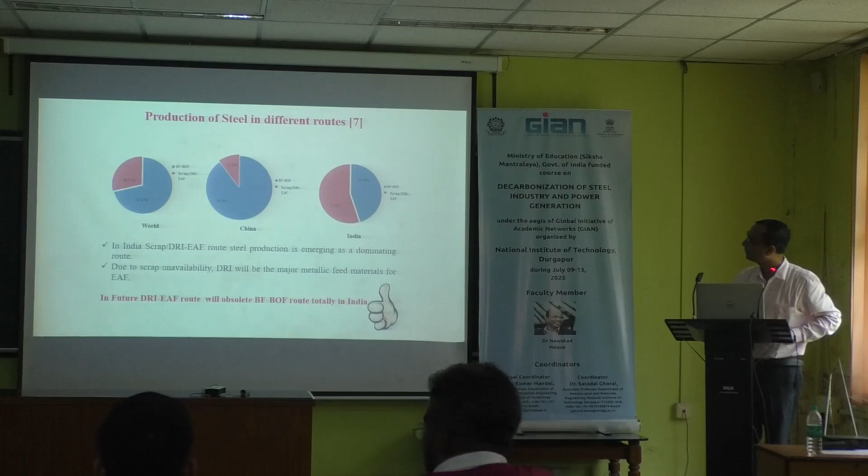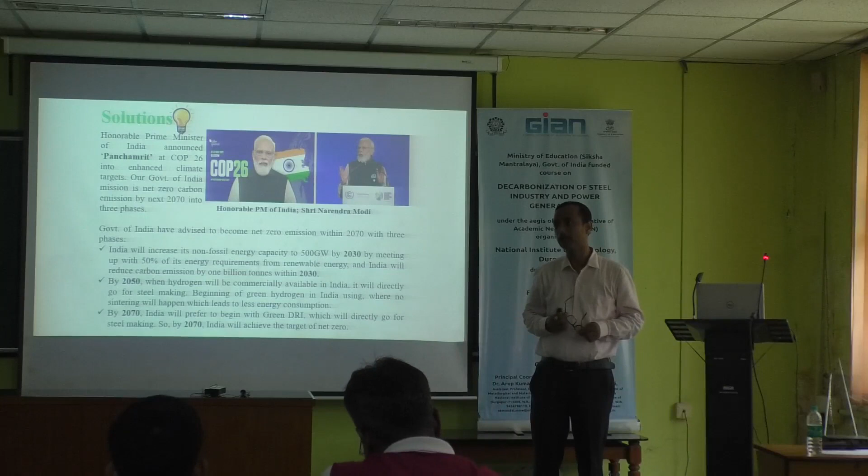We have already discussed a lot regarding alternate energy sources, biomass and hydrogen - these two are proven technologies. Biomass we discussed in the last PPT. Some participants asked for data regarding India - what are the initiatives of the Government of India. TERI will discuss this in detail because they are preparing the roadmap for decarbonization in India. By 2070, the Indian government has targeted net zero.

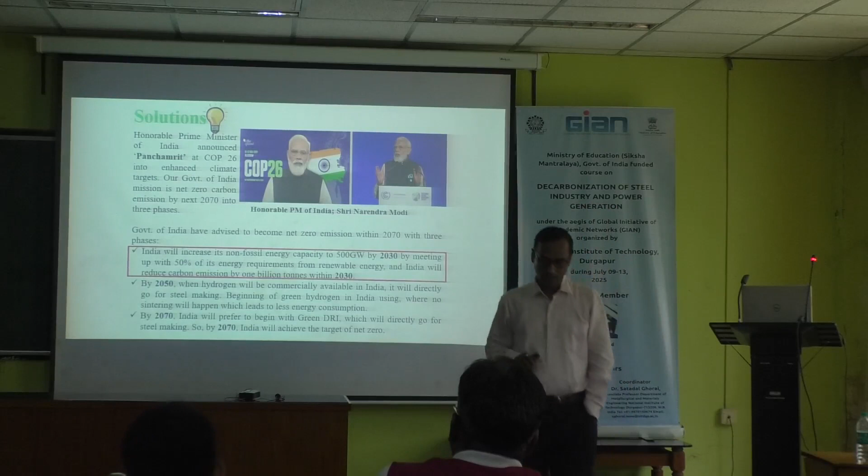We have decided how, in a stepwise manner, we will go for net zero by 2070. First, up to 2030, India will increase its non-fossil fuel energy capacity. This is as per the COP26 commitment. The Prime Minister of India announced the Panchamrit. By 2030, India will increase non-fossil energy capacity to 500 gigawatts, meeting up to 50% of its energy requirement from renewable sources, and India will reduce carbon emissions by 1 billion tons. I don't know how much will be achieved, but that was the target set at the COP26 summit.

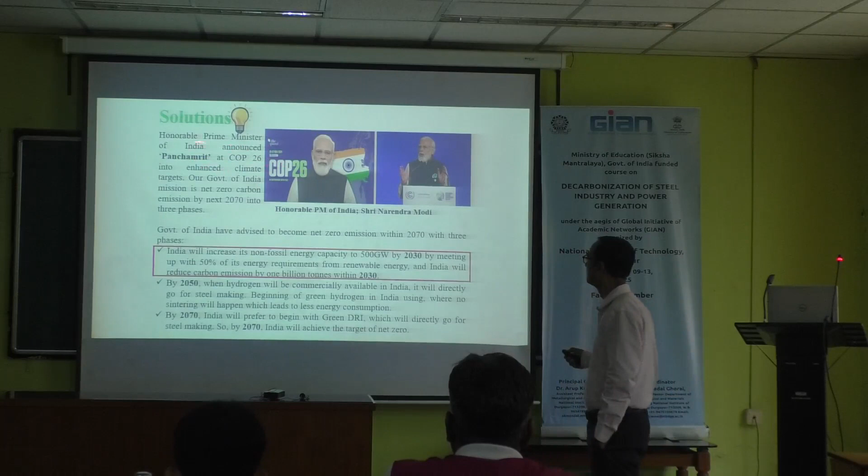By 2030, it means gradually we are going to invest and take initiatives for renewable energy. I will show you India's initiatives - not only the final projects but the projected investment, the total projected investment towards renewable energy sources, towards decarbonization. And by 2050...

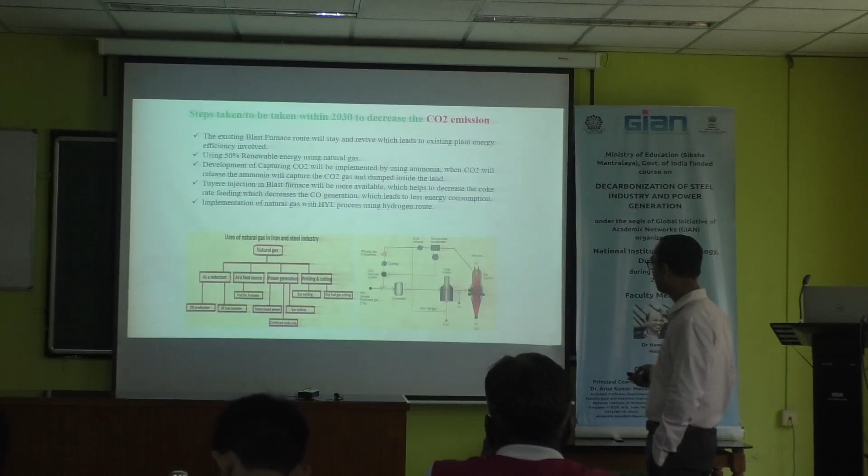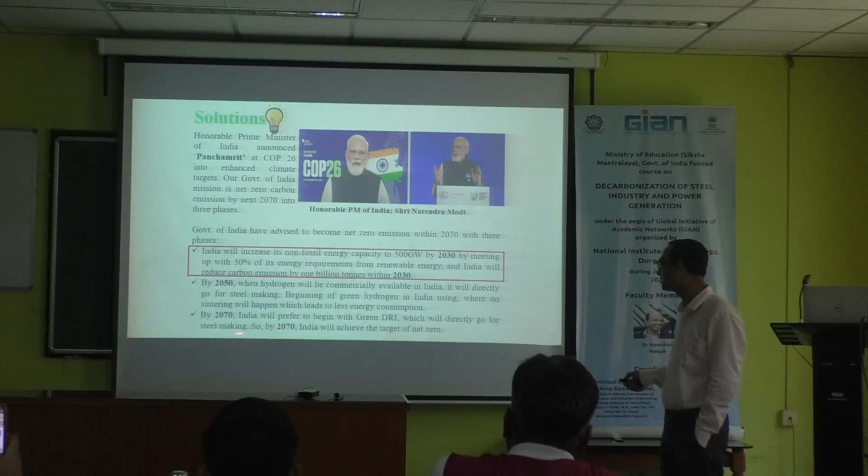When hydrogen becomes commercially available in India, it will go directly to steel making. The beginning of green hydrogen in India is where no sintering will happen. It means after 2050 the target is that sintering has to become obsolete. So we are not talking about scrapping the blast furnace, but scrapping the sinter plant. This means we have to focus more on DRI and pellets. By 2070, India will prefer to begin with green DRI and go directly for steel making. But by 2070 we won't be around to see what happens - therefore we can propose it for 2070.

So what should be the steps? First, the existing blast furnaces will stay because our main strength is blast furnace technology. Although we are the largest producer of DRI, we cannot obsolete the blast furnace route, but we can use 50% renewable energy. The second thing we have to take up in our presentation is development of CO2 capture, which will be the major focus, because we want to reduce CO2 emissions while keeping the blast furnace. So we have to manage CCU or CCUS.

I will show you the agreement and collaboration with the UK - we are investing in blast furnace technology. Although the replacement potential is only 10%, we have to increase it, through blast furnace fuel injection and implementation of natural gas in place of oil, which JSW is doing.

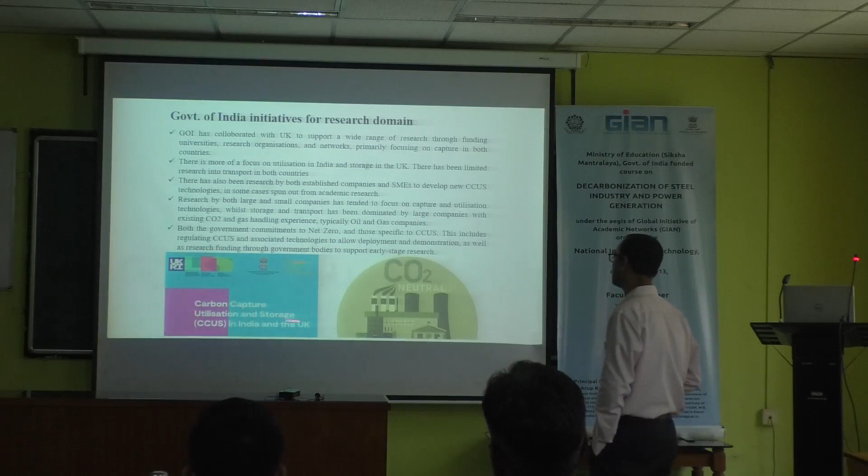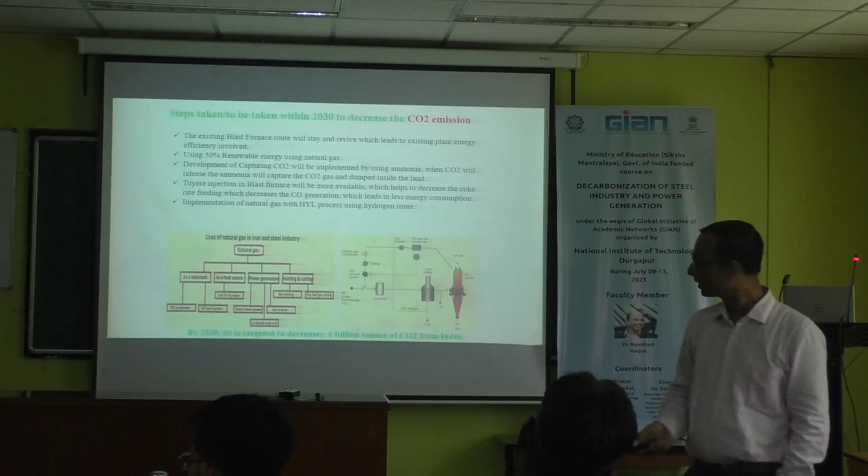In the previous slide, point number 3 discusses how ammonia captures CO2 gas, forming ammonium carbonate. Development of CO2 capture will be implemented using ammonia - when CO2 is released, the ammonia will capture the CO2 gas and dump it inside the land. A lot of technologies are developing, such as storage and utilization. Utilization is one aspect, but in case of storage, you have to stabilize the CO2, possibly using alkaline media or ammonia, to fix the CO2 so it forms a stable compound like ammonium carbonate that can be dumped. A lot of research is going on, not only for ammonium carbonate, but the problem is with the geologists...

The problem is the stability or life of this compound. How long will it stay as a compound? Is there any long-term effect or dissociation of that compound so that in future CO2 will again revert back? These are the issues.

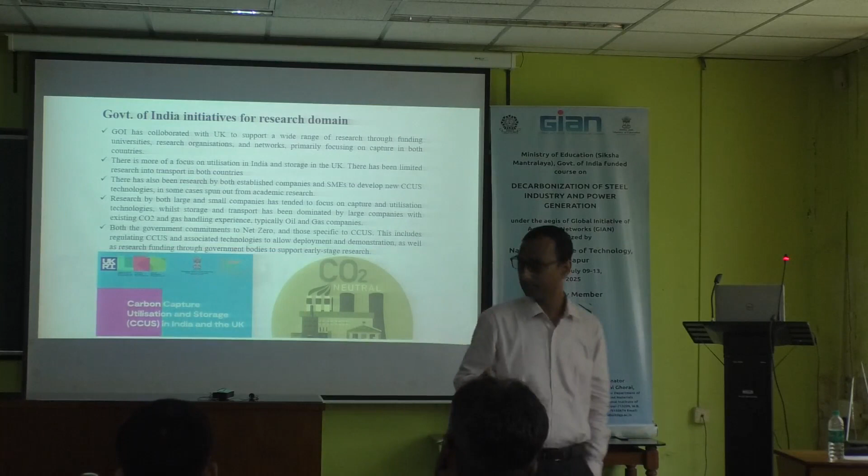So then you see the past initiatives, like joint collaboration with UK, Government of India. Another initiative for research and development, Ministry of Environment, Forest and Climate Change - India has raised their hand to achieve 280 gigawatts of installed solar power by 2030. You can see the press release. And an additional allocation of rupees 19,500 crore will be made for the production linked incentive scheme, for manufacturing high efficiency solar modules.

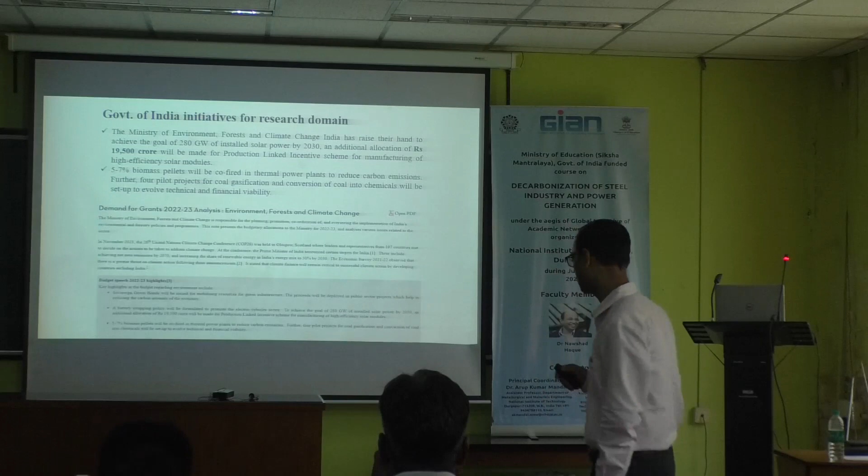It means if we have to make hydrogen with renewable energy, we have to concentrate on solar. India is a tropical country, and the average sunshine days are high in India. Therefore we have two benefits: one is growing of biomass, which has very high potential, and another is solar energy, which is going to be high. If you compare north and south, we are in a strategic location - India has this type of benefit.

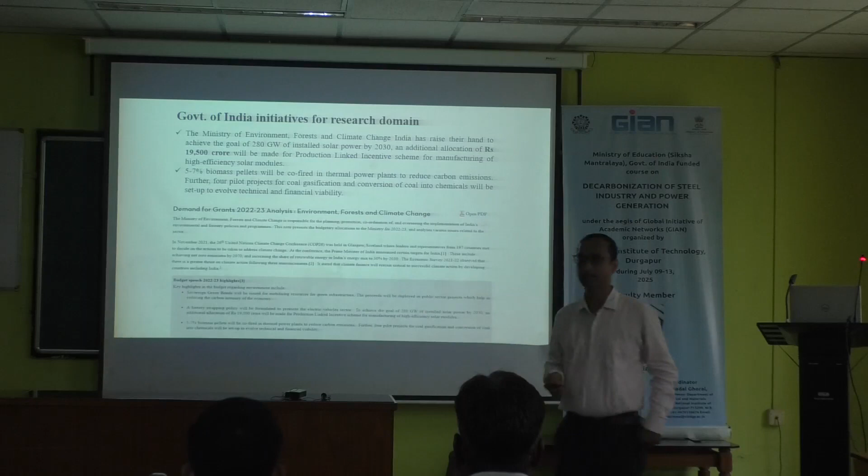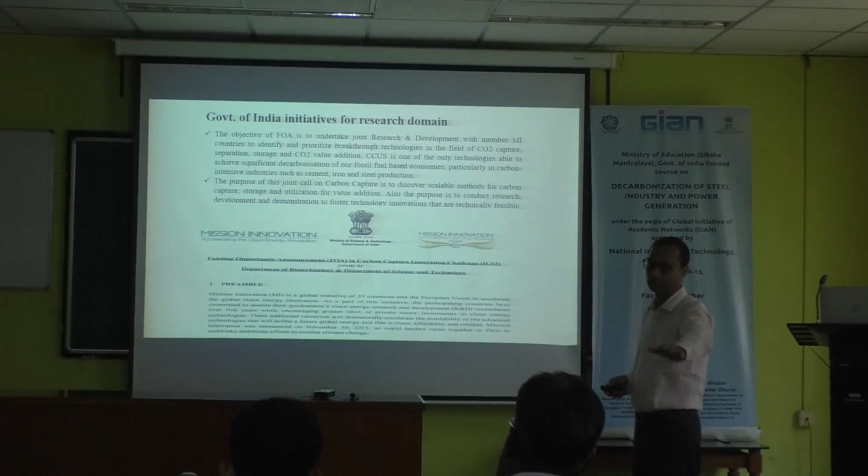Another one, if you see, is called Mission Innovation - a global initiative of 23 countries and the European Union to accelerate global clean energy innovation. The FOA is undertaking research and development with member MI countries to identify and prioritize breakthrough technologies in the field of CO2 capture. You can see the Indian government initiative - they have started regarding CO2 capture first, and after that the generation and production of renewable energy sources.

This is another initiative, it is called Urja Vikas Nigam Limited. Madhya Pradesh Urja Vikas Limited is actually established as a global leader in solar energy, especially focusing on solar energy investment.

If you see the different initiatives taken by giant reputed steel industries, one is ArcelorMittal, with two main purposes to reduce the carbon footprint. One is innovative, so-called smart carbon innovative DRI, focused on using hydrogen in the direct reduced iron process, meaning hydrogen-based DRI production.

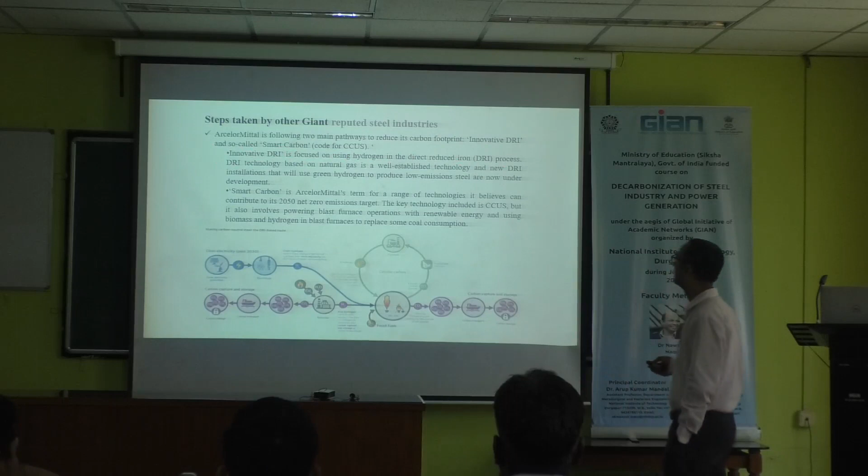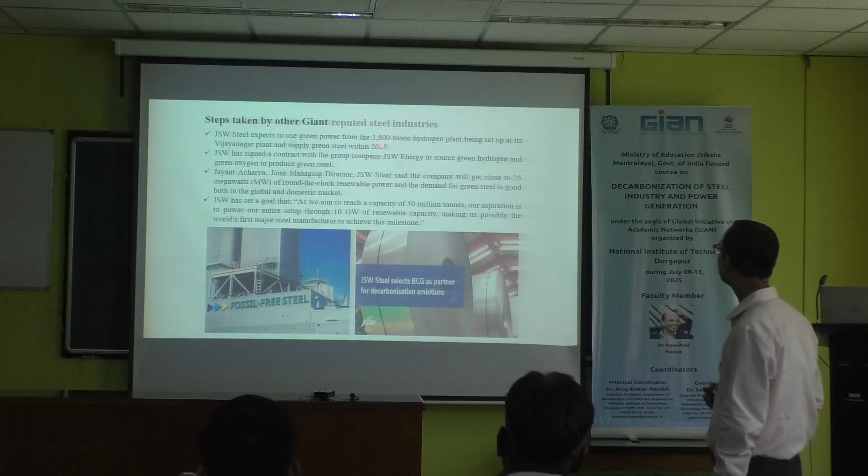Another one is JSW Steel. They especially use green power from the 3,800 ton hydrogen plant being set up at its Vijayanagar plant. What is the status, sir? Which one, the 4 million ton one? And do you have plans to set it up? This has been postponed, and we have started a 24 megawatt electrolyzer that will go to DRI. But your target was 2025, but this has been shelved. 24 megawatt, how much production will there be? 10,000 cubic meters.

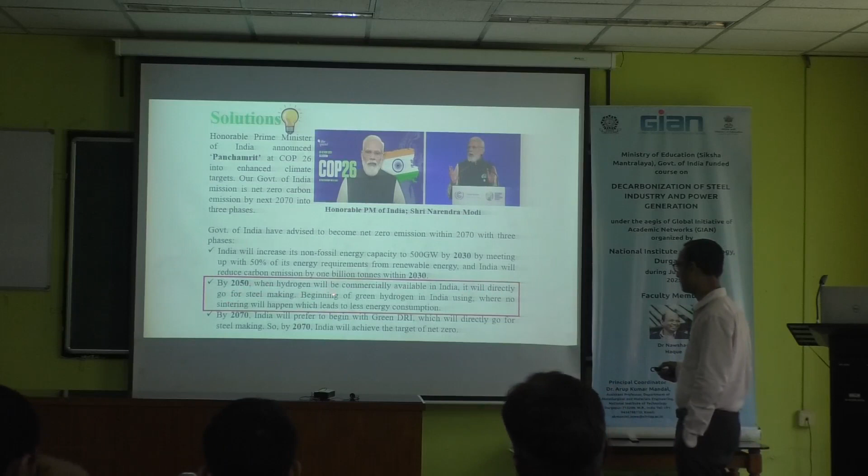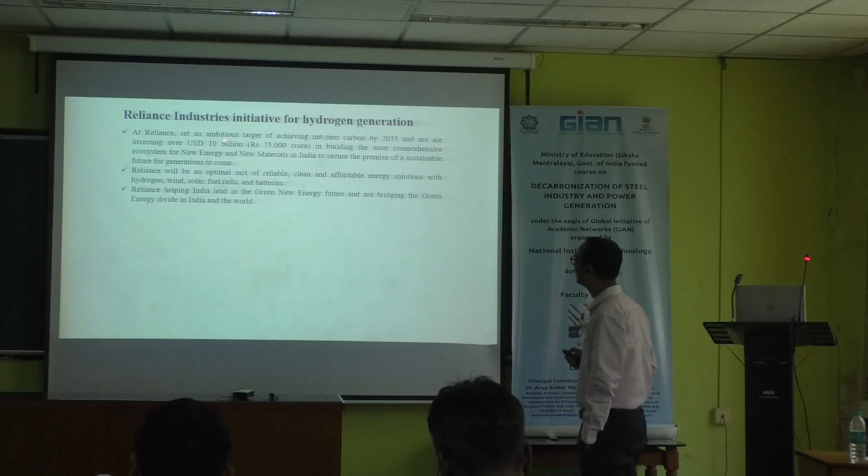Then think about 2050 - when hydrogen will be commercially available, it will be directly used for steel making. Then obviously the investment should be regarding hydrogen production. I will discuss the projected investment, because still now we cannot say how much has been invested. So projected investment, one is Reliance Industries, achieving net zero carbon by 2035 and investing over 10 billion dollars, near about 75,000 crore - it is available.

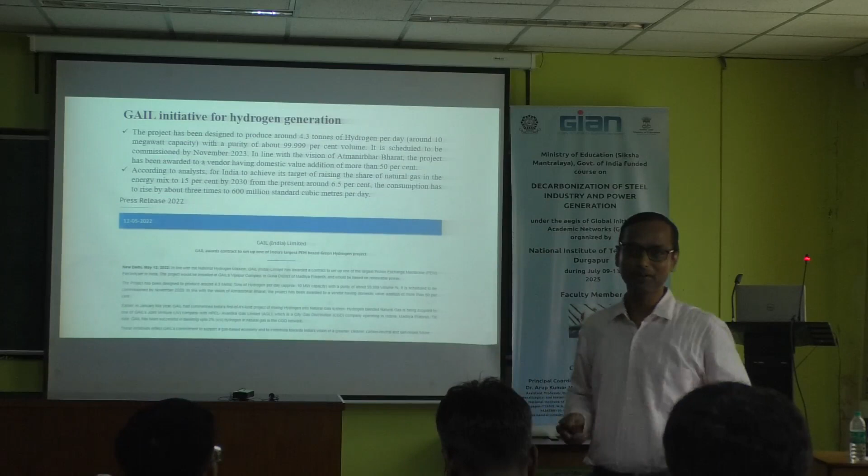Number two is GAIL, gas operator of energy. They have also received contracts to set up one of India's largest PEM-based green hydrogen plants. Has this been commissioned in November 2023? Is there any press release from 2022? No, but what is the current situation? GAIL has laid down the pipelines - whether it has been charged or not, I don't know. Similar initiative by NTPC.

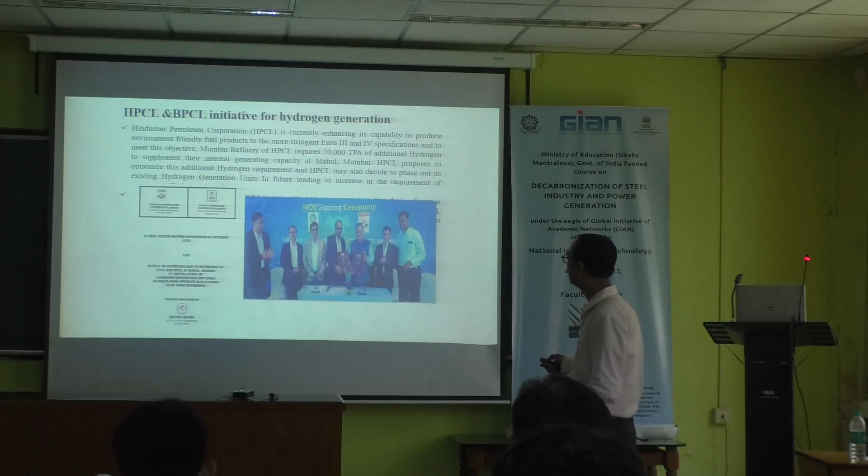Indian Oil, L&T, HPCL, BPCL, Adani Group.

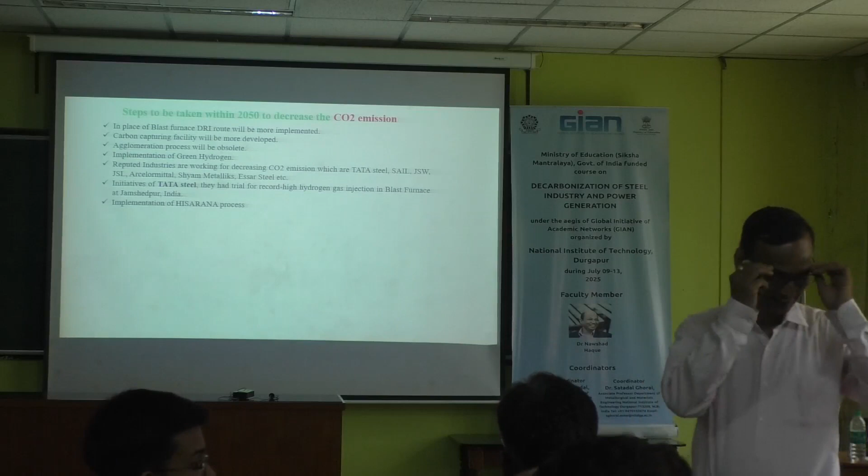You know the story of hydrogen injection, no? Stories, sir, no sir, means they have tried it. It's a sample - it was for I think 1 or 2 years, for 30 minutes, then stopped. And that was a press release, that was the strategy, yes.

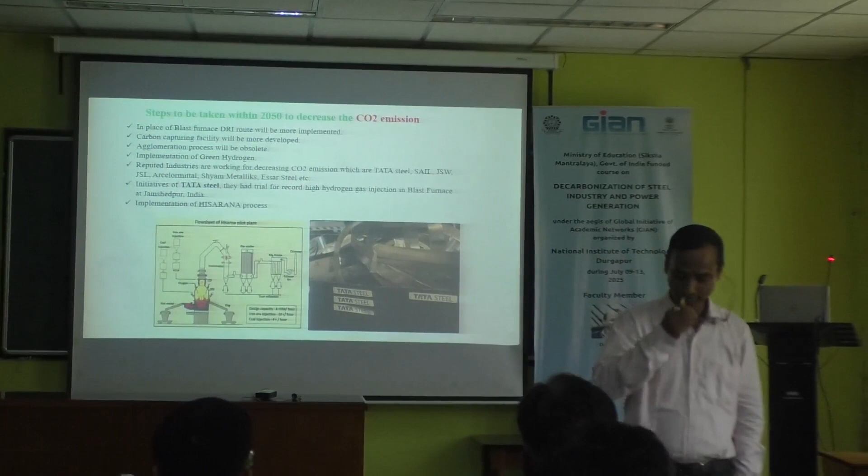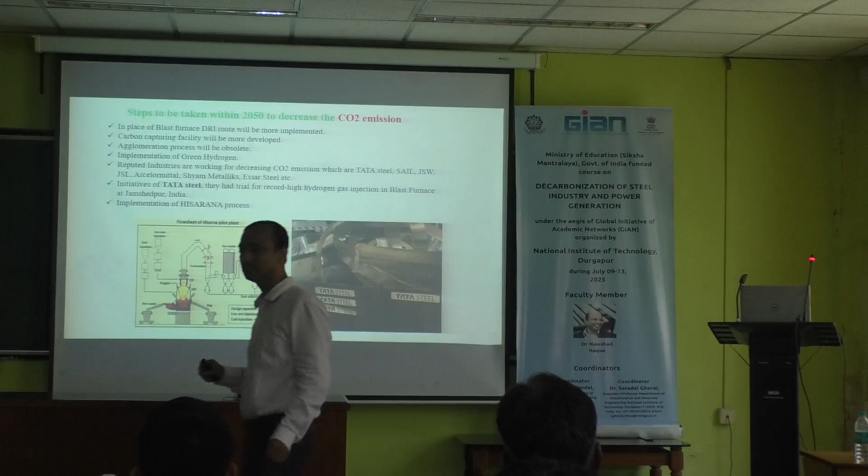Then, number two is the HIsarna process - having implementation of the HIsarna process, there's an easy one. I asked Devashish Chakraborty, the name of the CEO of the partnership - I think Devashish Chakraborty, last meeting, NKT. Sir, what is the status of HIsarna? Because HIsarna is actually Tata Steel technology. The HIsarna process is coal-based - the beauty is that if you use coal fines directly along with iron fines, it will produce the metal. It is one type of very high speed smelting process.

So you can see here, iron ore and coal will be injected there, and it will form the hot metal and slag. The beauty is, it doesn't require any verification, any agglomeration, or coke making.

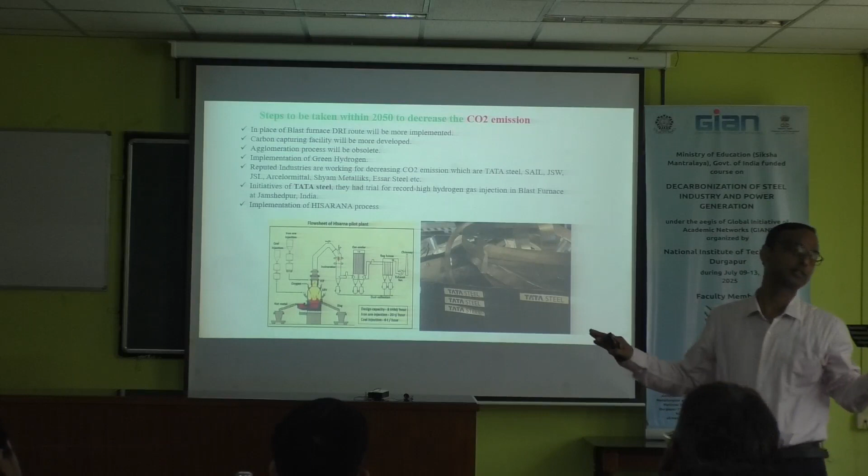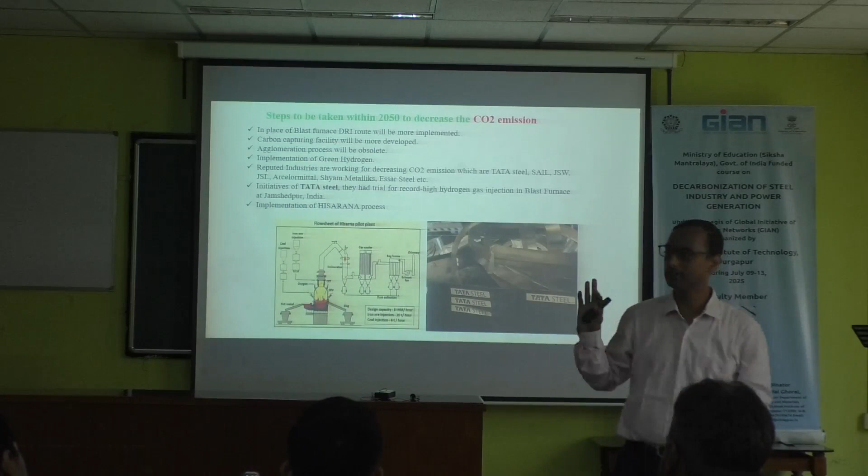So you can cut down all the intermediate steps of steel making. Therefore I discussed smelting reduction. This is also smelting reduction, but the problem is the use of coal is problematic. Otherwise, all other positions are advantageous.

Tata Steel Netherlands is actually developing this process, revamping it, because earlier the problems were refractory issues, number 1, and number 2, the nozzle problem. They are revamping these issues.

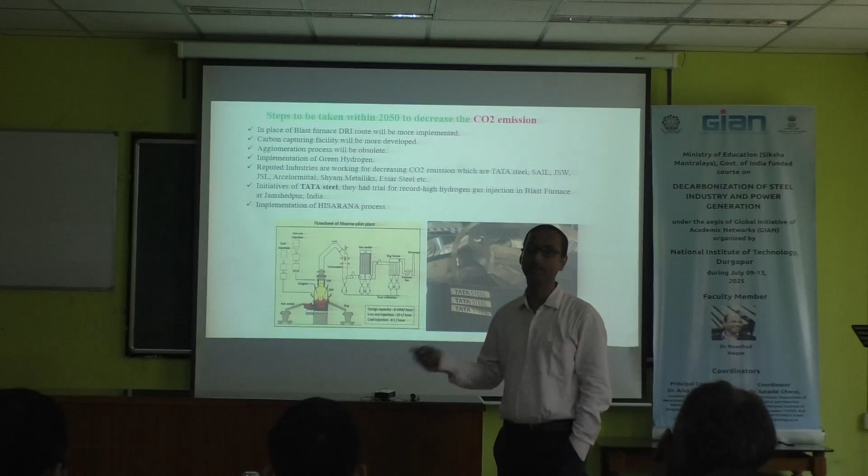I think within the next 5-10 years, they will give a newer technology, slightly replacing the conventional HIsarna process. It will give protection to reduce CO2 emission to a greater extent in this process. But commercial application is difficult; they have only a pilot type plant in the Netherlands.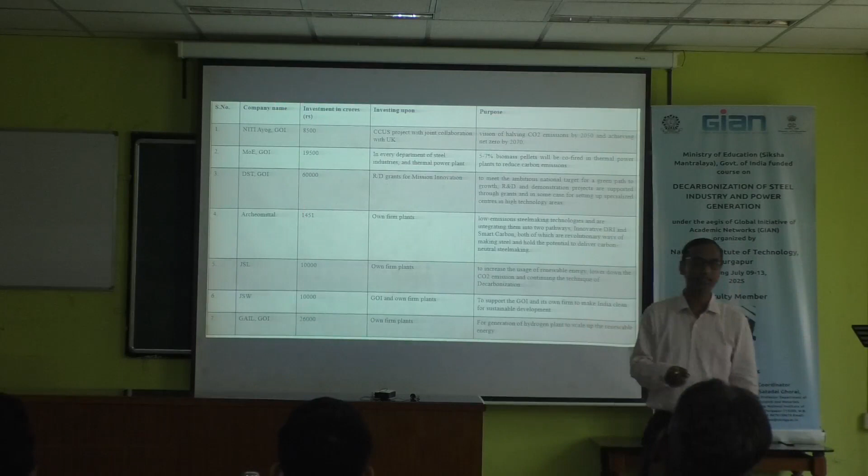Then directly I have to go back. So the issue with this is the projected investment. You are telling me how much this project is.

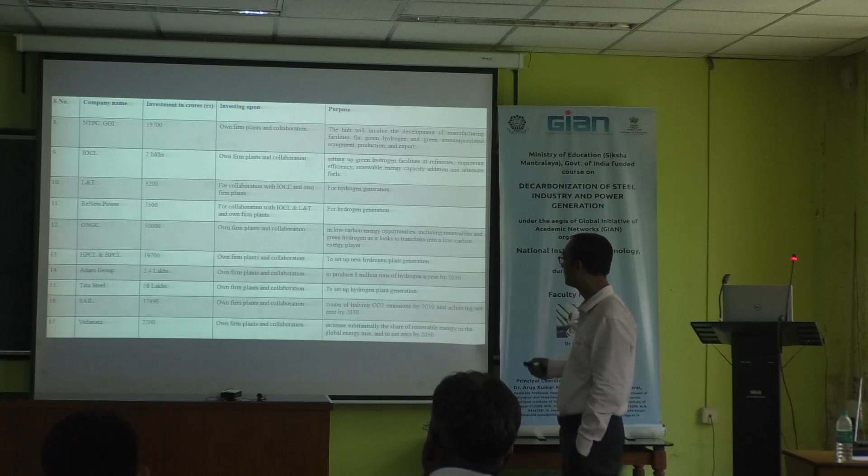This is the projected investment, like Niti Aayog, Government of India, any Government of India, DST, etc. NTPC, IOCL, L&T, Renew, ONGC, HPCL, BPCL, Adani, Tata Steel, Vedanta - these are the projected or committed investments.

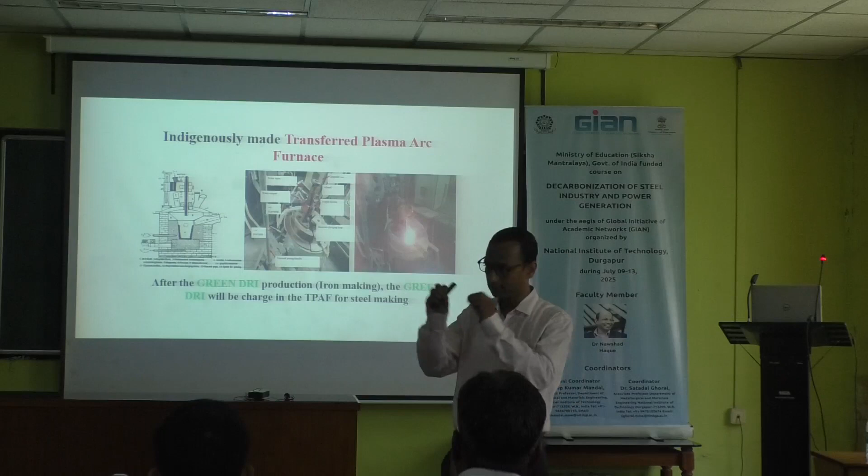We have done 4 types of concrete work. One is related to impurities removal, meaning direct steel making, a one-step steel making process. We have the patent, and it is already published. Number 2 is direct stainless steel production.

Number 3 is from the waste, smelting of the waste to recover the alloys. And the fourth one we have done, it is not actually cast iron, therefore I have not mentioned it here.

That pellet we have tested in electrical furnace or in removal with the conventional lime charging. So what is the difference?

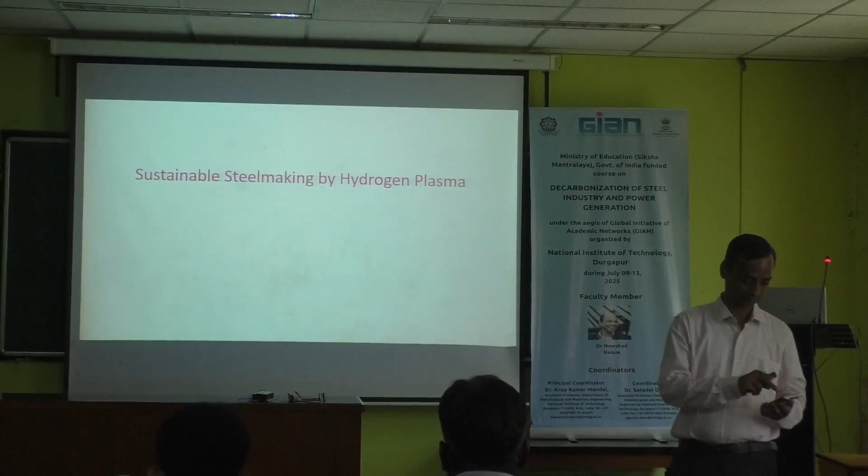Sustainable steel making means sustainability. It means it will reduce the emission level, reduce the energy consumption, and another point I discussed in the first PPT - sustainable not only to reduce energy and emission, but also to reduce waste generation. If your process generates a lot of waste, it is not a sustainable process. So here I will discuss how to decrease the waste generation.

Mainly in steel making, the waste generation is the slag. So for 1 ton of steel production, if you see solid waste generation, it's like iron making slag, steel making slag, sludge, and gas. Simultaneously gaseous waste will also be generated. We are concentrating in this study on solid waste generation.

It means majorly you see iron making slag, primary slag, secondary slag. Why is it required? Because iron making will obviously generate it, but my concern will be the primary and secondary steel making slag, because we are discussing sustainable steel making development.

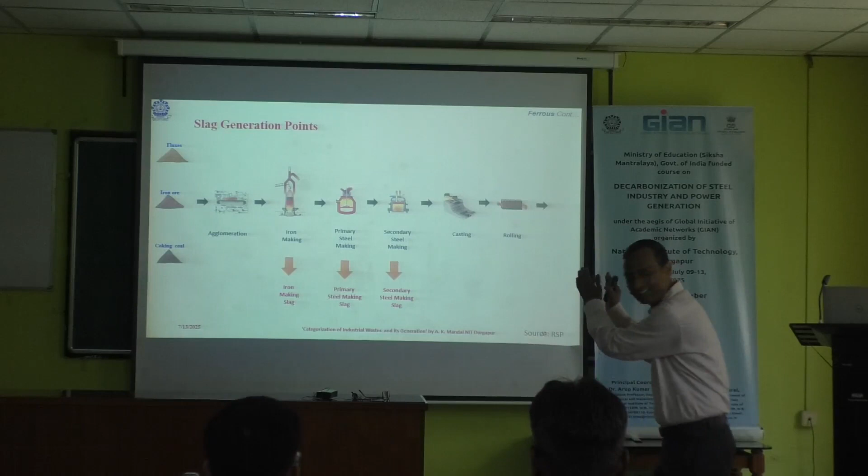Consider that it will be DRI - then you have to handle the slag in steel making and refining both. So actually the slag is generated due to removal of impurities, and in the conventional mechanism all impurities are removed through the slag phase. So except carbon, you see silicon - how many are there?

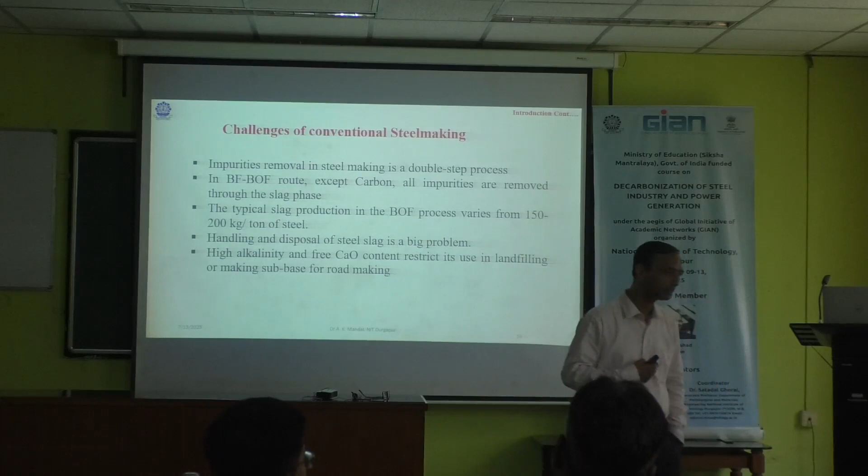Impurities removal in steel making is a double step process. This is the challenge. Double step means removal of sulfur you have to treat separately, removal of silicon you have to treat separately. It requires both reducing atmosphere and oxidizing atmosphere. It means it is always a double step process. Number one, this is the challenge.

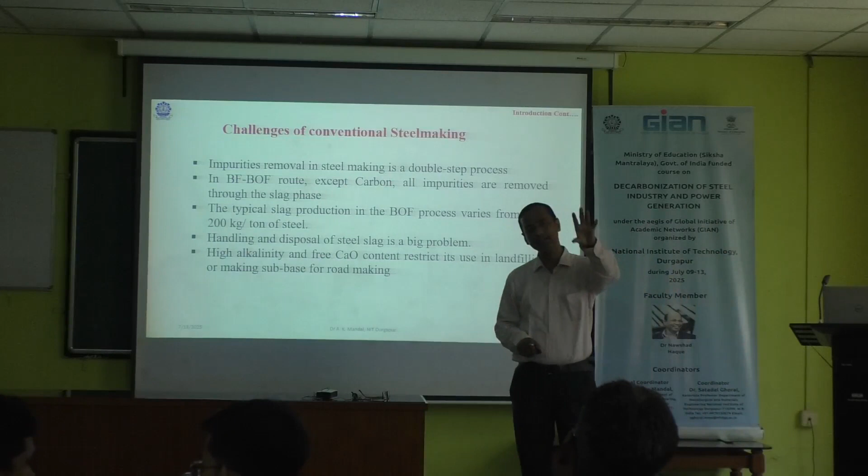Number two is BF-BOF route, except carbon, all impurities are removed in the slag. It means minimum amount of slag generation is still obvious, you have to generate some amount of slag. Although you have...

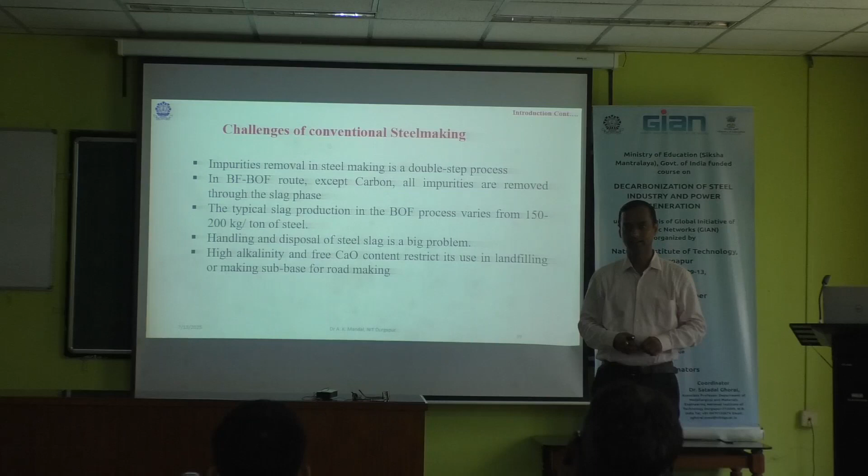They have started the setup of the metal recovery plant. It has been commissioned. Asia's largest slag handling.

When we are talking about sustainable steel making, it should obviously involve removal of impurities, meaning reduction of CO2 and reduction of energy. Except that, if all impurities are removed in one step, then obviously the time consumption will be less as well as the energy consumption will also be less.

Number two is, suppose you reduce the slag generation. Now if slag is less, then there will be no problem or issue of handling.

Then what happens? If you see, the impurities are mainly carbon, silicon, phosphorus, and sulfur. Carbon can easily react, and it is already reacting. Therefore, it is removed through oxygen, reacting with oxygen. All impurities react with oxygen and go to the slag. But the problem is with sulfur.

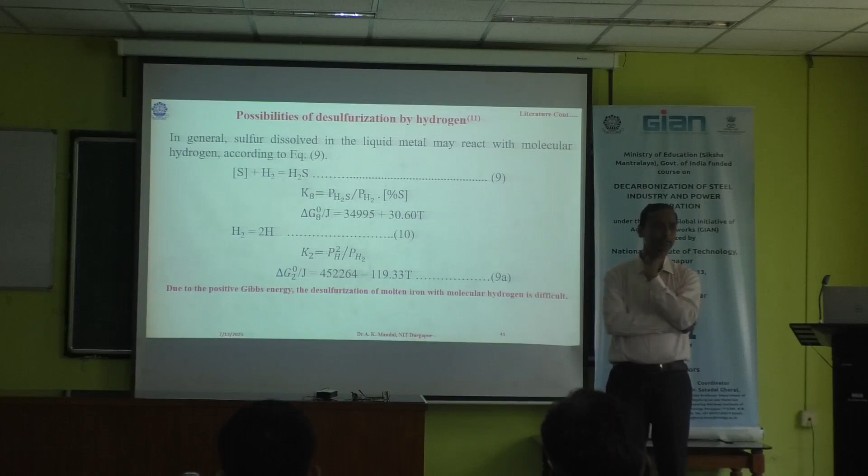If you introduce any gas which will react with all impurities simultaneously, then that gas can reduce all the impurities. Sulfur, it is not possible to reduce by oxygen blowing. But if you introduce such a gas, it will react with all impurities present inside the liquid metal. Then all impurities can be removed.

Hydrogen can react with all impurities. It can react with carbon, manganese, phosphorus, sulfur, all impurities. Hydrogen can react. But the problem is the reaction of hydrogen with sulfur present in the liquid system, liquid metals. If you see the reaction, the positive free energy restricts sulfur from reacting with hydrogen gas.

So if I want it to react with sulfur present inside the liquid, it requires the ionized phase. When it is in the ionized phase, hydrogen plasma generates a very high temperature, making it possible to remove the sulfur from the liquid. Then it is possible to reduce it. And for this, very high temperature is required.

I think you can see, this much high temperature is required, which is not possible in normal steel making. Normal steel making temperature is 1500, 1550. In case of stainless steel, it is 1600. You cannot go beyond that. But 2200 or more is required. Then it means you have to generate this.

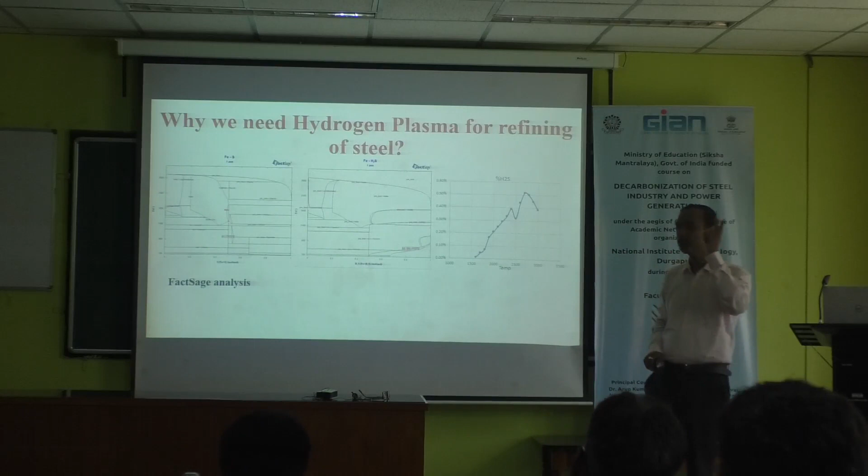Number one is high energy, high temperature. Number two, your hydrogen should not be as a hydrogen gas, because thermodynamically it is not possible to react. Then you can go for the plasma.

One is non-transfer, another is transfer. Non-transfer means the electrons are directly emitted. Negative and positive are there inside the torch, and the flame will be generated. You will only get the flame. Therefore, it is the non-transfer, meaning the arc is not directly struck to the liquid metal. Here, liquid metal acts as positive.

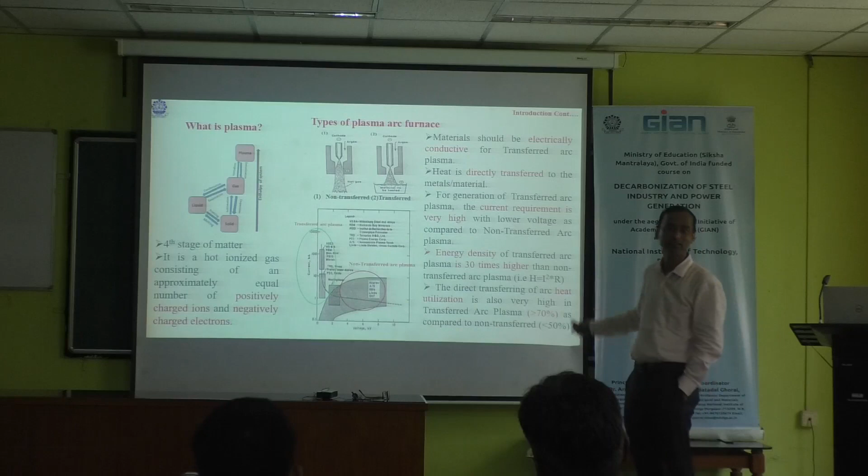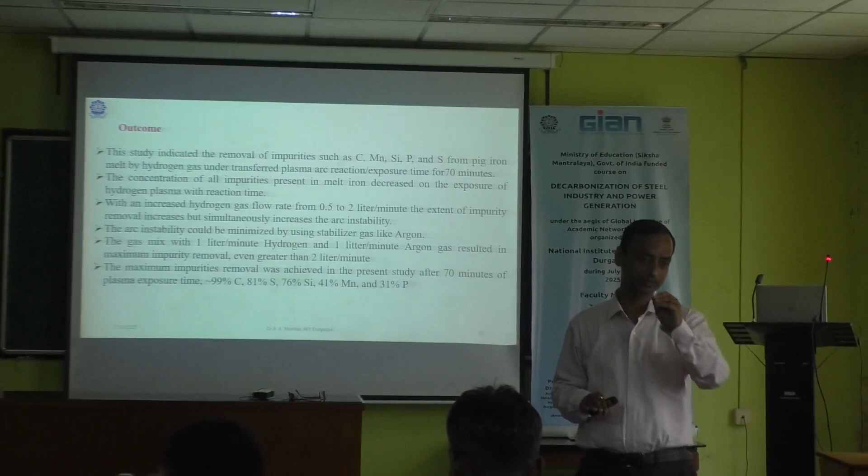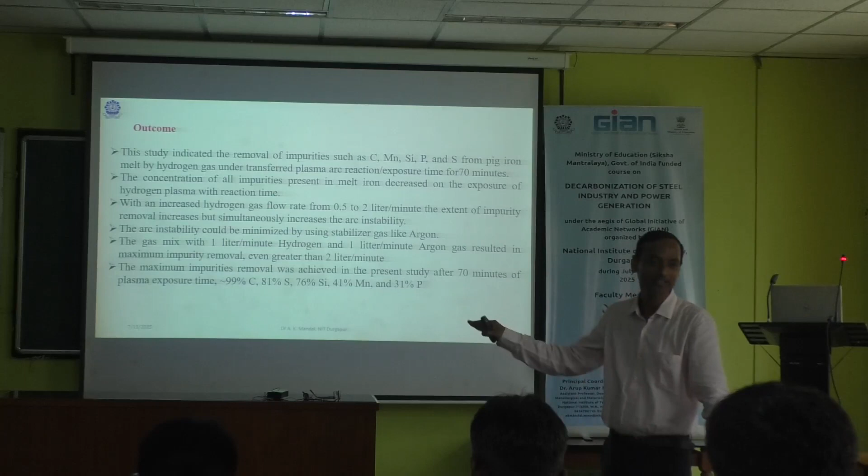So then, why is this manganese and phosphorus removal less? If you see, actually in our system, for the kinetic study it requires sampling at regular intervals. When you open the lid, there will be some air entrapment inside. Because at that time the arc stops, you have to stop the gas. At that condition, when you stop the gas and remove the lid, there will be oxygen, meaning air entrapment. Air contains oxygen, which produces a manganese oxide layer at the surface. Then this creates the problem of further removal of manganese.

I think we have done the regression analysis on different parameters to see how it is affected. Because this is the area of my student, when we did it.

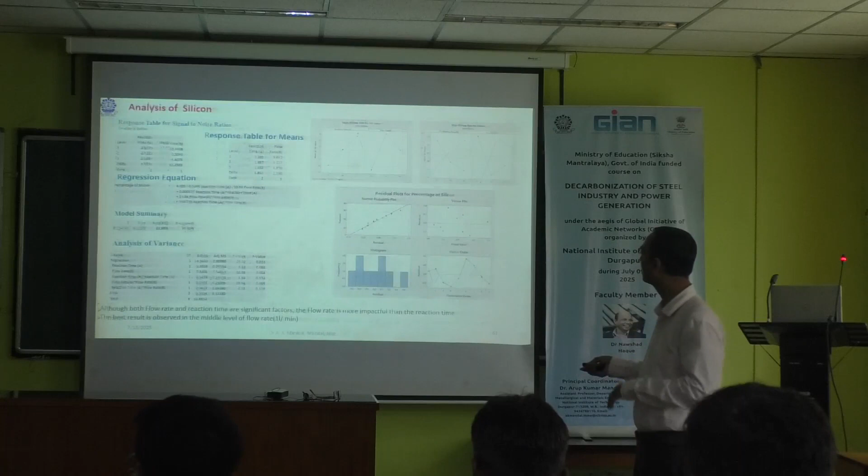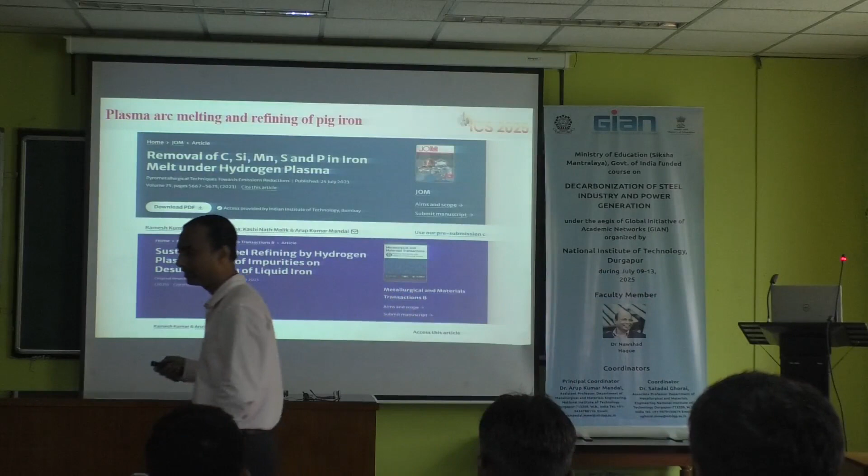So we have also studied a neural network based prediction model, because normal prediction using regression will not give you accurate data. Think about it: when you are considering a multi-component system, what happens? You are putting in hydrogen and gradually all parameters are decreasing simultaneously. For example, only carbon will decrease first, then sulfur will decrease, and they decrease simultaneously. Therefore normal regression analysis cannot give the exact explanation, so we have prepared a neural network based prediction instead.

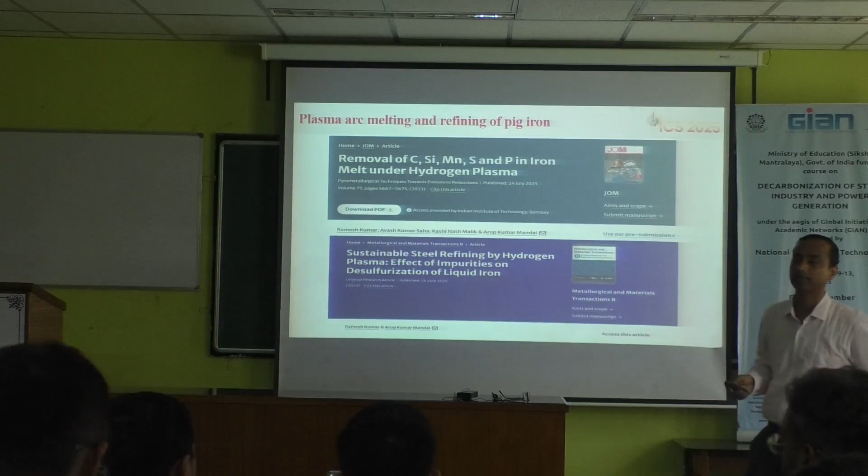Then we have published 2 papers on this. The second area we have is metal extraction from industrial waste, which was my PhD work, and on that day I skipped that one.

Here we have taken different bottom ash, iron slime content. I will tell you why iron slime is required here also.

We have changed the crucible lining materials like graphite, magnesite, and normal, where there will be normal arcing, nitrogen plasma, as well as hydrogen plasma. Smelting time we have varied from 10 to 80 minutes. Production was characterized for liquid metals, different elements and how much liquid metal is produced, slag, how much slag is produced and their composition, and dust, how much dust is produced and their composition.

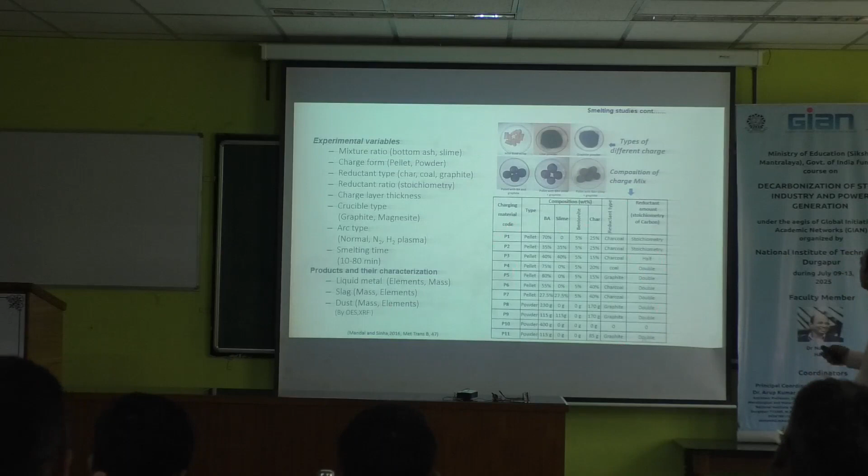Therefore, initially metal is required. Some half of the scrap material we have melted, and after that the remaining scrap material is melted. When total metal pool is prepared, then you can see the switch over from normal arc to plasma, meaning through the electrode introduces the gas so that the plasma will generate.

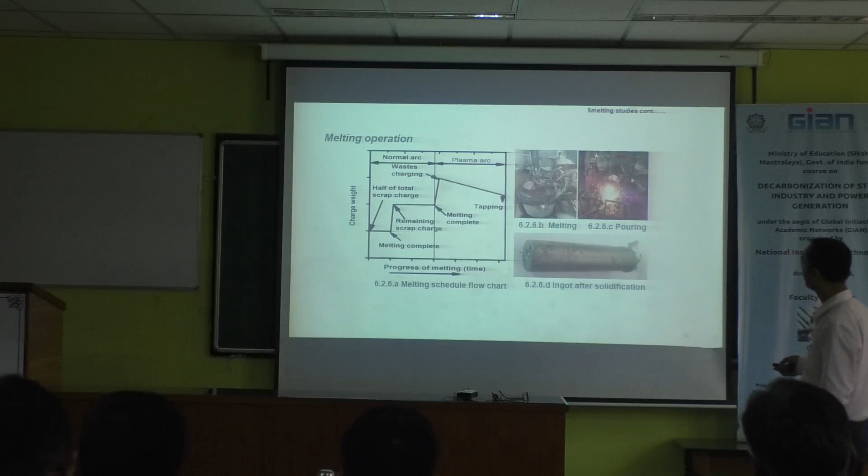Then after melting, gradually we are taking out the samples. This is the different materials, like in case of different crucibles - I have discussed graphite crucible, magnesite crucible, different ionizing gas, different exposure time. If you see the exposure time, this is 10 minutes, 30 minutes, 60 minutes, 80 minutes.

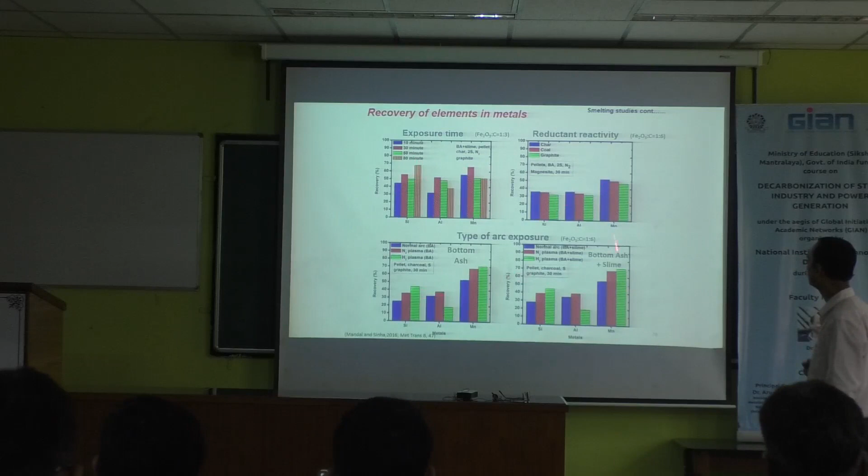Silicon, aluminum, manganese - different metals are recovered. This is the charge material, pellets as well as powder. You have observed that if you charge the pellet material, there will be less recovery compared to the powder materials, because in pellet materials the particle spaces are more, and at high temperature when specific metals like aluminum evaporate - aluminum having lower vaporization temperature.

Therefore, at that temperature, if the metal is produced and you provide intense heat, it will easily escape out. But if you put a buffer like fine starting material, it will effectively capture the produced reduced metal in that layer. Therefore you will get higher recovery.

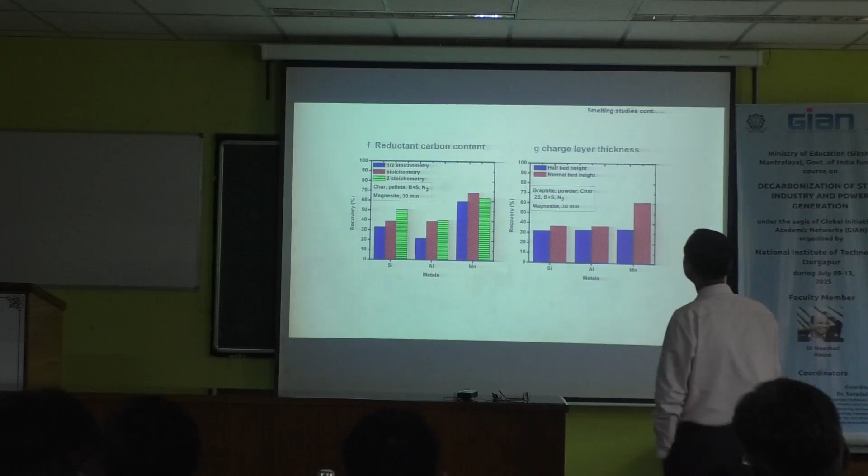For crucible types, if you see the graphite crucible, it shows higher reduction because of arc stability. Since graphite crucible is already conductive in nature throughout the area, electrons can transfer, therefore arc stability is better. Then it's the reductant carbon content - half stoichiometry, increasing stoichiometry, double stoichiometry, without stoichiometry charge there. Ultimately, what we concluded from this study is the partial recovery of aluminum and silicon in the metal bar indicating the carbothermic reduction of alumina and silica in the charge at all.

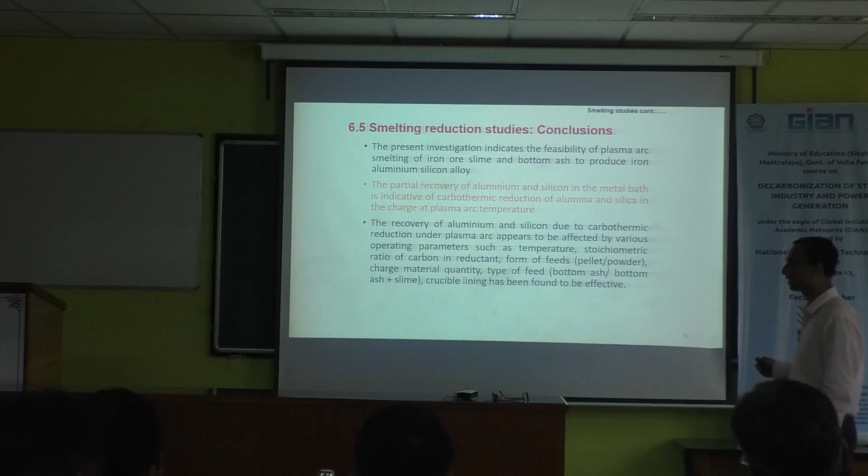It means as we use carbon content, in nitrogen plasma you can also get the metal - meaning you can recover the metal, but it can be enhanced by using hydrogen plasma. Then the carbon percentage in the charge mix or the pellets can be calculated to decrease.

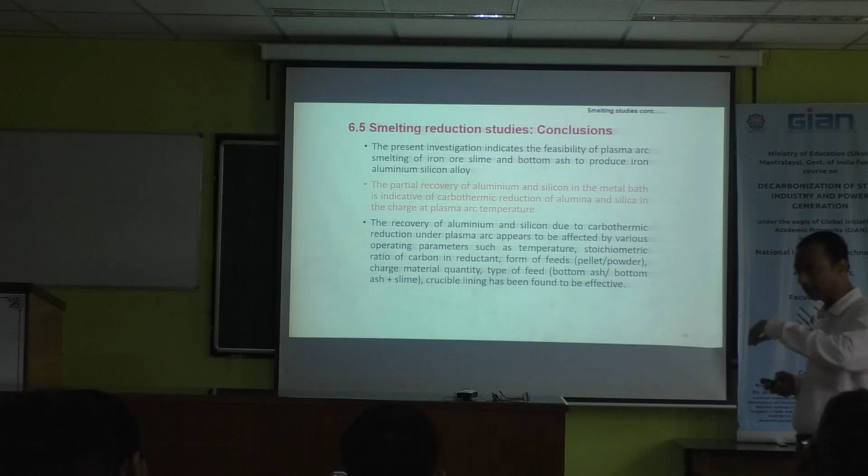Different papers from this study - we have published one paper which I discussed, like pig iron flux pellets, optimum flux pellets for the removal of impurities from the pig iron, and we have induction melting furnace, and we have compared with the lime, conventional lime also.

So conventionally, how is it prepared? Low carbon ferrochrome is required. This ferrochrome is an alloy element which is used to get the chromium content in the steel. But low carbon ferrochrome is required, otherwise the stainless steel grade will have high carbon and it will not give you the stainless property.

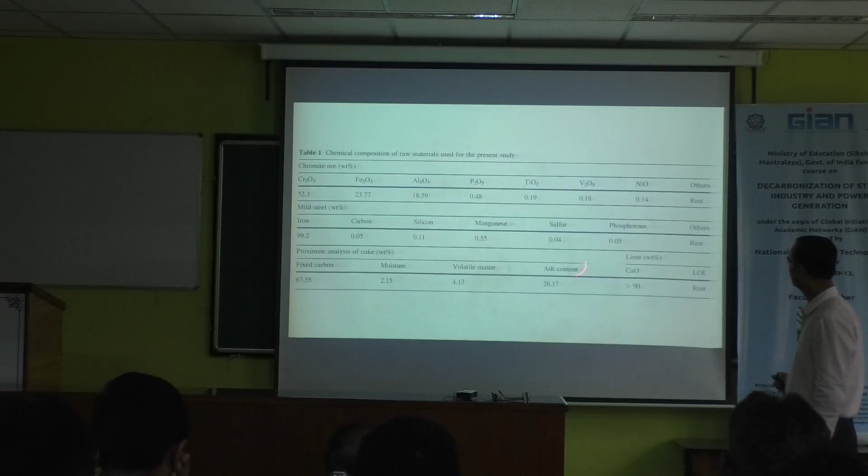The question will come: what will happen? We have prepared here... we have prepared one, like Cr2O3 overburden, containing 52.3%, Fe2O3 was 23.77%. Then, to adjust the composition, mild steel is also added. We have prepared different mix compositions.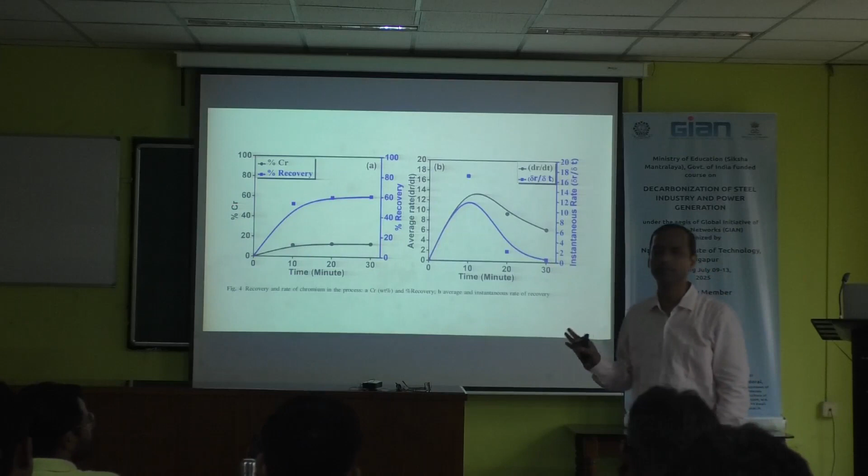If you see chromium recovery in case of hydrogen plus carbon charge - with only hydrogen plasma, the reduction recovery is less. But with addition of stoichiometric carbon, and double the stoichiometric carbon, you can see on the next slide that recovery reaches almost 60%, with time - up to 20 minutes exposure you get the maximum. The beauty is, when you use hydrogen, carbon content is less, but when you use nitrogen, you can see the chromium content is actually higher here.

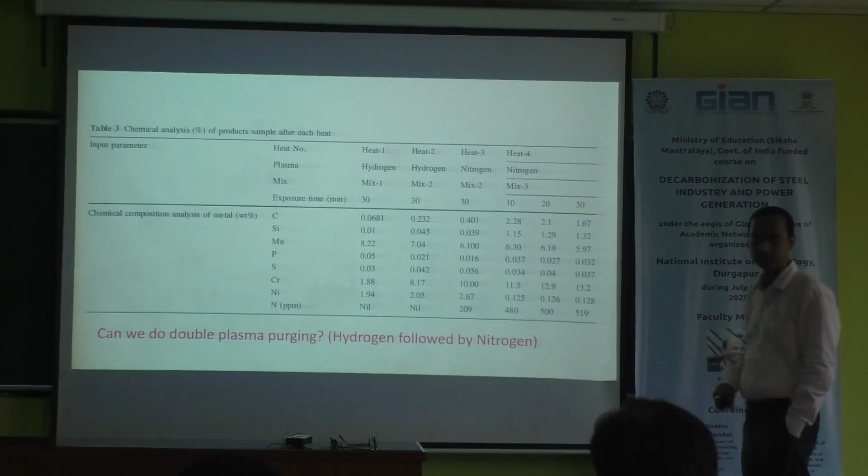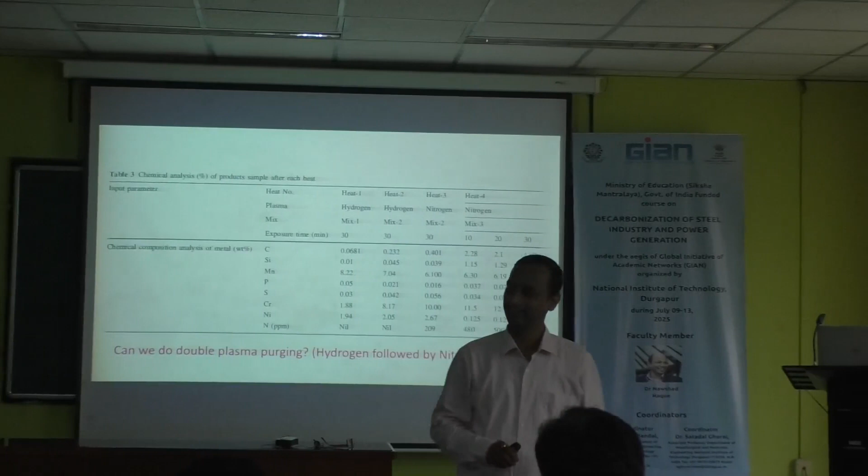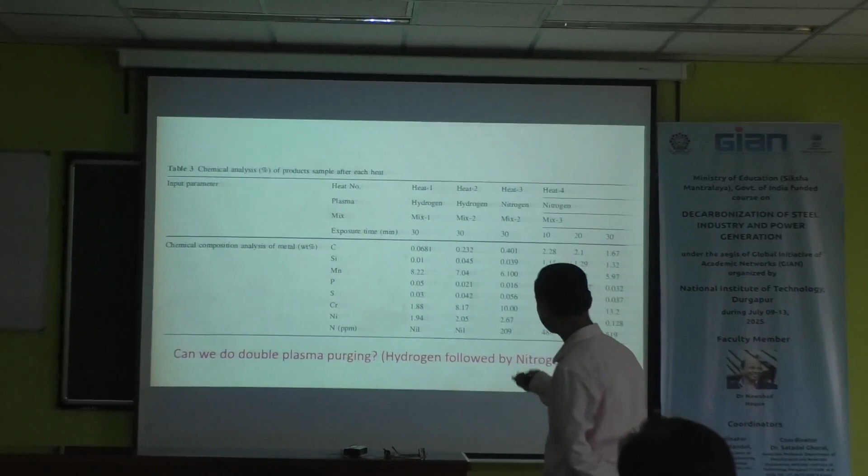Here in mix number 3, with nitrogen - our requirement is also nitrogen. Therefore, if you change the composition of the plasma, what happens? When your requirement is nitrogen absorption, you use nitrogen plasma. Then you withdraw the nitrogen plasma and insert the hydrogen plasma. What happens? Hydrogen will react with the carbon, as I discussed in the past case, and it will give you the grade of stainless steel. In this paper, which we published at that time, we proposed this.

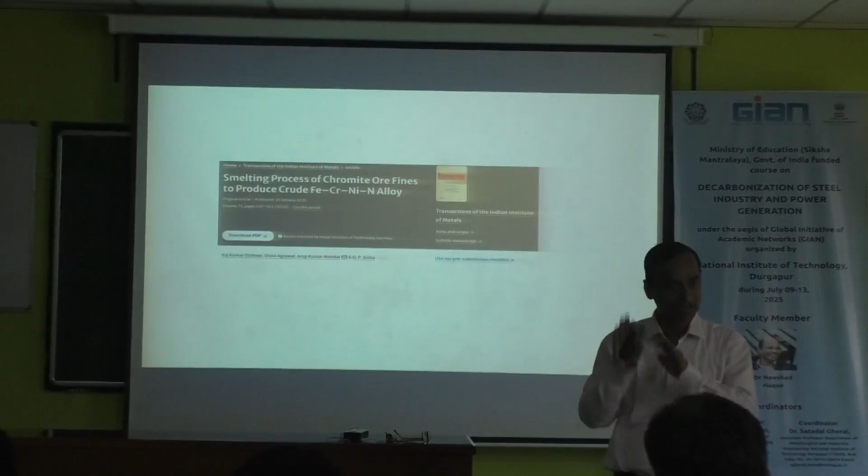We prepared the crude stainless steel grade, but at that time, by hydrogen plasma reduction, we did not actually think about it fully. But when we introduced the hydrogen plasma in those cases with the students, we understood that if we introduce both plasmas simultaneously - initially nitrogen plasma, that will be great - then after switching over from nitrogen to hydrogen, we will get, as per our requirement, the stainless steel directly.

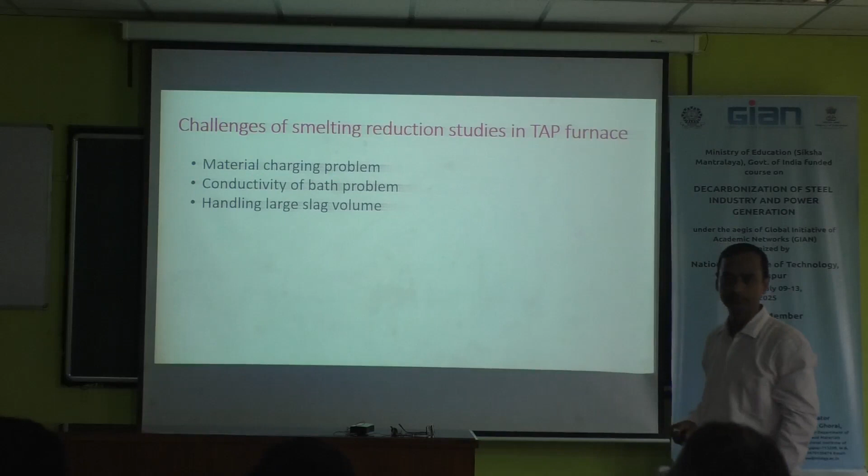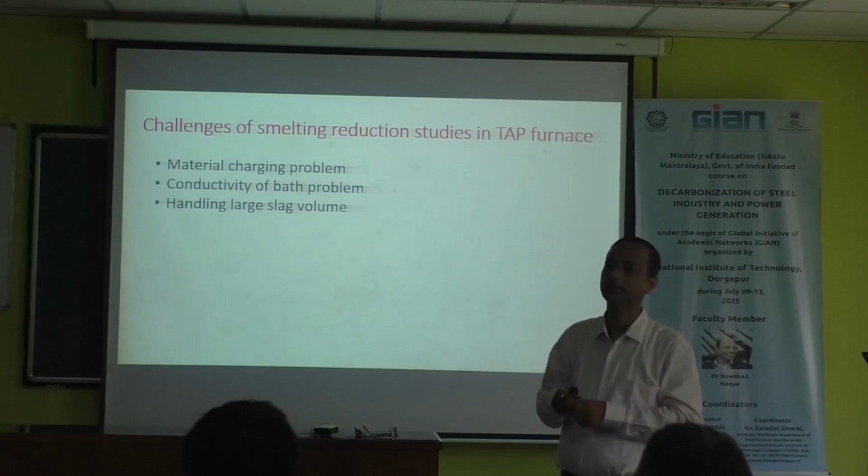So, just the last slide: what are the challenges of smelting the steel? I have discussed all of this. One is the material charging problem - how to charge. There are two types of charging effect. One is in-flight plasma, meaning through the nozzle tube you can directly charge. Because plasma involves arc pressure and also gas pressure, a lot of fines will come out from the system and go to the ESP.

Therefore, we have tested the effect of pellets. If we prepare pellets, there will be less emission. Also, conductivity of the bath problem, as I have discussed, and handling of the large slag.

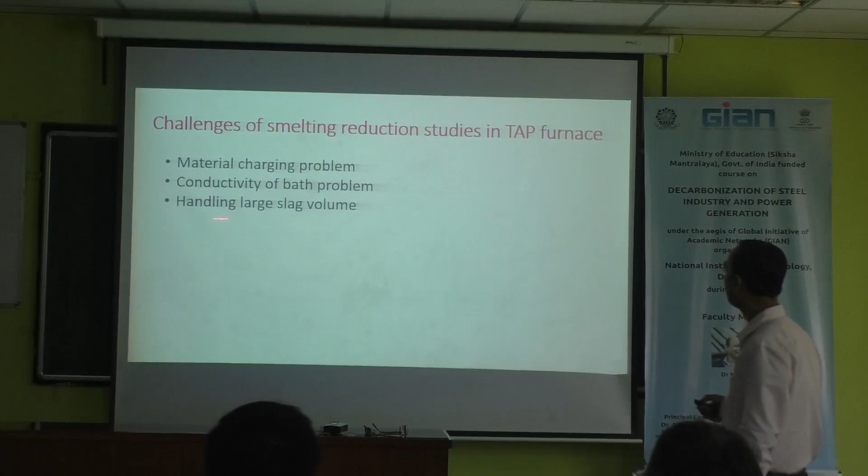When we talk about waste material treatment or recovery of metals from waste materials, what happens? Suppose valuables are 10%, and 90% are other oxides. Then it will generate a huge slag, and since slag density is less, volume-wise it will generate a large amount.